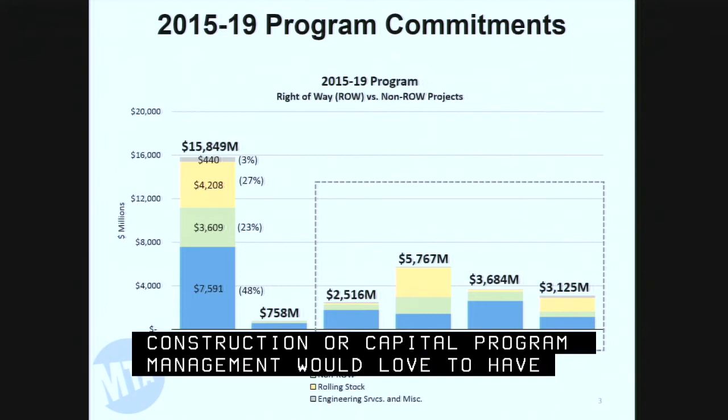We've been given a unique challenge, a great challenge, one that I think anybody in the field of engineering, construction, or capital program management would love to have: the ability to spend $15.8 billion over the next 3.5 years, all while running, maintaining, and operating the railroad. So this chart here, a different representation of the capital program, starts to show you the overall challenge in a different manner. It breaks it out into right-of-way work and non-right-of-way work.

Obviously, the right-of-way work is the work that potentially has an impact on the different operations of the railroad. So there's a big focus on making sure that as we roll out the program, we do it in a very strategic manner, very well coordinated, one that does everything possible to minimize the impact to the riding public. So of the 15.8, some $7.6 billion is right-of-way work, and that includes the in-house track work you saw on the preceding page. So as we go about planning which projects we're going to award when, we will look at the right-of-way needs of those projects for outages and how we can best manage it and spread that work out over the course of the next 3.5 years.

A major commitments follows chart. It starts to show you the typical projects that we will have.

Signal work is a big part of it. You'll see in this chart CBTC 8th Avenue, CBTC Culver, and 2 interlockings at 30th and 42nd Street. That's the kind of work Nadish is going to report on today, with follow-up reports as these projects are under design and construction under his purview.

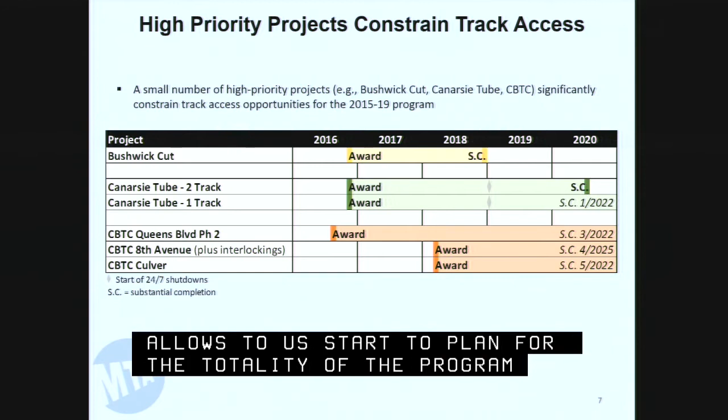So I'm going to repeat here a little bit about the Canarsie, but it winds up being, number one, the story of the moment, but also probably the largest project that New York City Transit will be undertaking for some time.

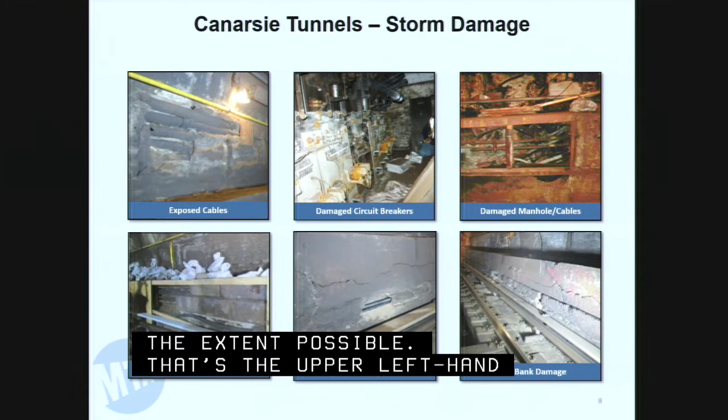The Canarsie tunnels did suffer some extensive damage. These photos start to show you pretty graphic details of the damage that occurred. The duct bank, which we saw video of earlier this morning at Transit Committee, was significantly damaged. We have exposed cables. We've secured the duct bank to the extent possible, that's the upper left-hand photo. The duct bank continues to be monitored such that any spalling or shedding of the encasement onto the tracks below is monitored very carefully.

Additionally, we've talked about all the damage that occurred to the electrical system. I'm now referring to the middle photograph on top, the damaged circuit breakers. That shows the type of damage that salt water can do in a very short period of time. This is a photo of the damage shortly after the storm, not an age-progressed photo. Damaged manholes and cables in the upper right.

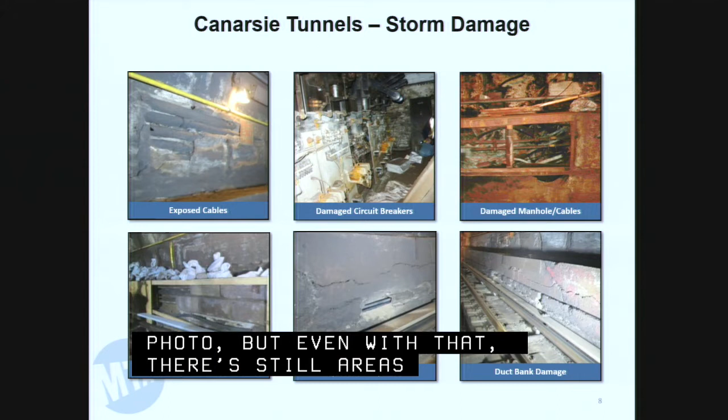Can't say it enough about how badly damaged this under-river tube was, but for all the facilities we've gone in and done temporary repairs, that's the bottom left-hand photo. But even with that, there are still areas you can see here with significant cracking of the duct bank, that's the lower middle photo, and the duct bank continues to show that damage.

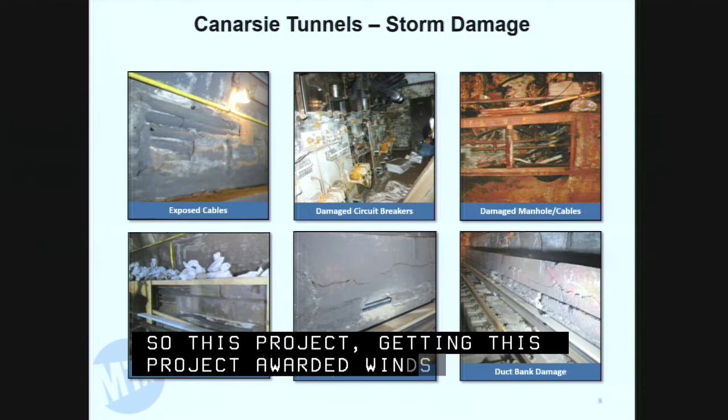So this project, getting it awarded, winds up being a priority in the program. The track part of it will not start until 2019, because there's street-level work that has to occur in 2017 and 2018 to prepare for the actual track outages beginning in 2019.

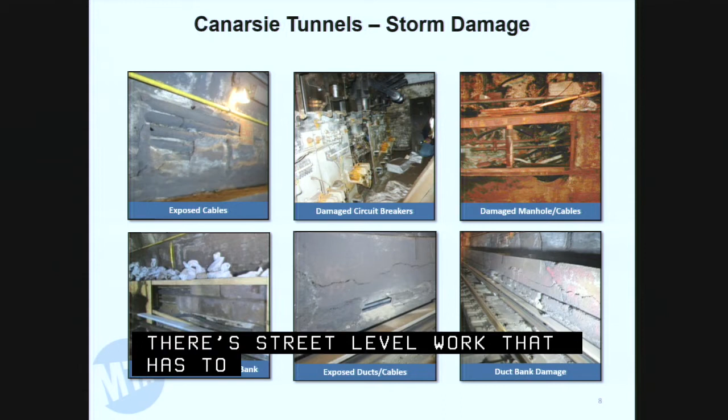Canarsie is in of itself a program of projects. It is a combination of a number of different initiatives: the under-river damage resulting from Sandy, the hardening of that facility so no water can flood into there again - that's the North 7th Street shaft as well as the Avenue D shaft, and the addition of 2 new substations that will allow for additional throughput of train capacity.

It is ADA and stair capacity at Bedford Avenue Station as well as at First Avenue Station. So it winds up being a roll-up of a number of different efforts all into one project, done in a manner that does not extend the outage duration at all.

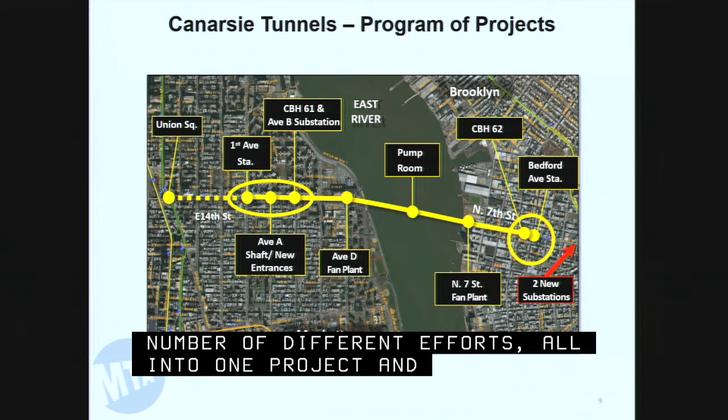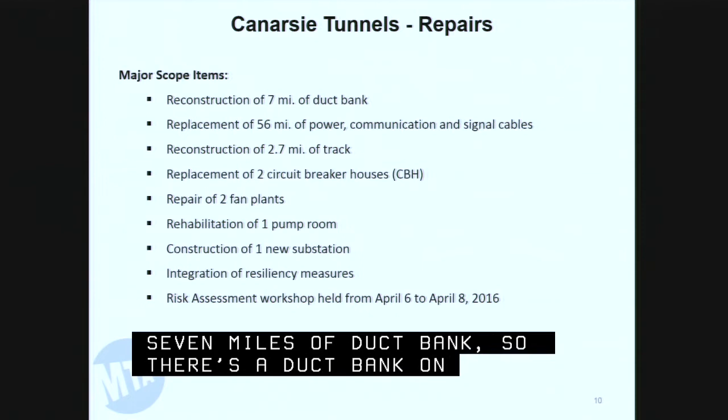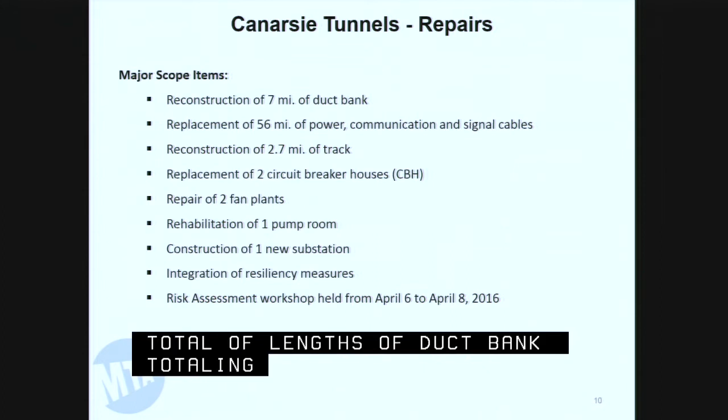We're going to replace some 7 miles of duct bank - there's a duct bank on both sides of each tube, so a total of 4 lengths of duct bank, totaling some 7 miles, that have to be demolished and replaced. There's some 56 miles of cable work. These are not small cables, this is very heavy-duty cable to pull and put into service.

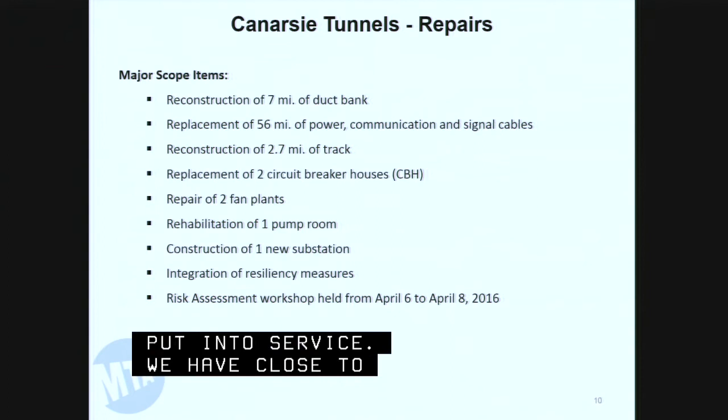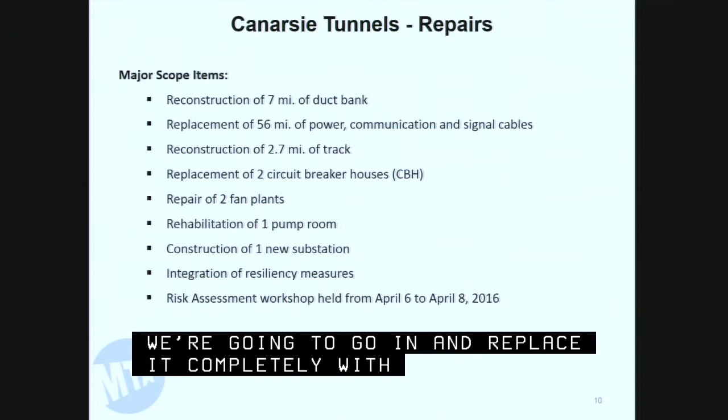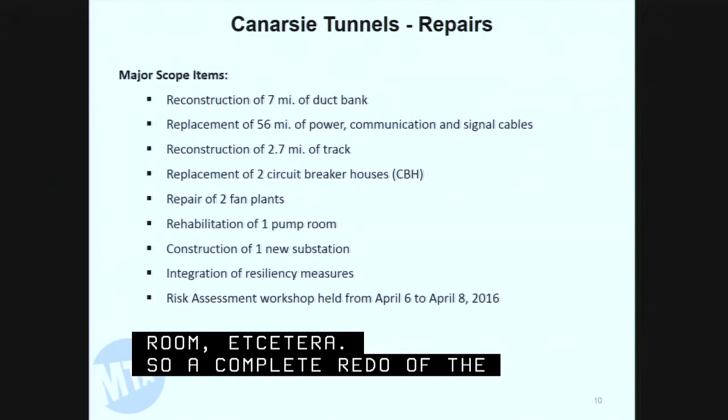We have close to 3 miles of track to rebuild. The track is going through an exaggerated deterioration that causes us to monitor it and make sure it's safe, but we're going to go in and replace it completely with this project. We're going to be building 2 new circuit breaker houses, repairing the fan plants, rehabbing the pump room, etc. - a complete redo of the systems necessary to provide for safe operation through the Canarsie tube on a long-term basis.

So that's Canarsie's $1 billion of the total $13.5 billion that Capital Program Management, New York City Transit Capital Program Management, is going to have to deliver over the next 3.5 years. But in order to deliver the rest of the program, we have to look at both the internal resources necessary - internal design and construction staff, as well as support staff - and we also have to rely heavily on the consulting community for design support and construction management support.

We call it CCM, Consulting Construction Management. We've been building on that for the last few years, and we're going to need to continue to build that in order to have the necessary support from outside to develop and progress this program.

I talked a little bit about track access planning and the need to optimize right-of-way access such that we minimize the impact to the riding public, which we will continue to develop and streamline. We need to work closely with the community and our customers through the construction process, and we have to embrace alternative contracting mechanisms such as design build.

We have avoided design-build for right-of-way type projects for quite some time because it's not the kind of project that necessarily lends itself to a design-build strategy. However, as an example, we are going to try it, managing the Clifton Shop project as a design-build where there is right-of-way interface. There are many other design-build projects we're going to be doing, but I'm just trying to give examples of the projects that we have.

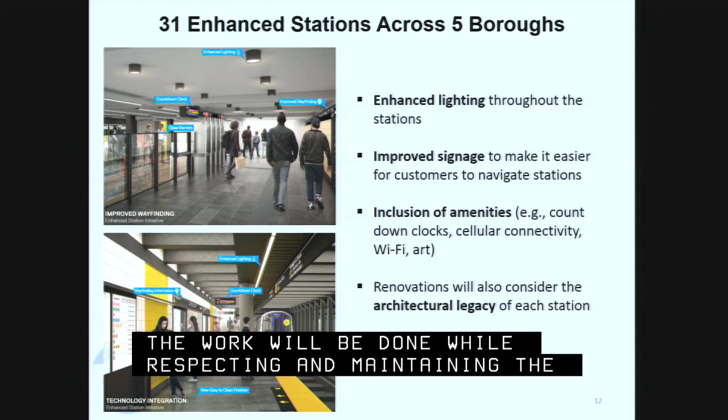We're going to be including amenities we don't currently have, such as countdown clocks, cellular connectivity, and Wi-Fi. There will also be use of art to enhance these stations. The work will be done while respecting and maintaining the architectural legacy of each of the stations we go along. So that's just a synopsis of the kind of work we're going to be doing as part of this enhanced station effort.

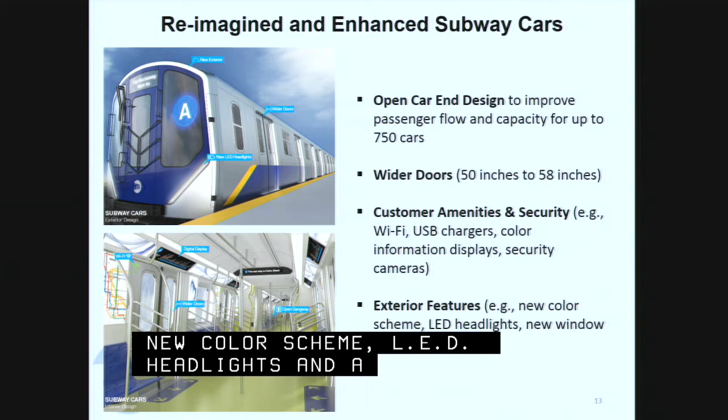So these are the kind of projects and programs that are underway within the $15.8 billion of the 2015 to 2019 capital program. Thank you.

How were the 31 enhanced stations chosen? They were chosen from within the program proposal. There was a number of stations chosen from the overall capital program proposal that had already been made when this challenge was brought to us.

So we worked with stations that were already in the program proposal. Some of them were in as formal renewals - some on the Astoria line were actually going to be getting renewals - and some were in as component projects where we were doing certain levels of component repair. So we took those stations and looked at them, and we're just elevating the aesthetic treatment they're getting to enhanced station renewal. They were already in the program.

But we tried to get a balance - in the past we'd gone to high volume stations, but in this particular case we needed to take another look with respect to geographical distribution. So there was no single factor; looking at it through a number of different prisms - volume, condition, geographical representation - we tried to get these 31 stations across the entire system.

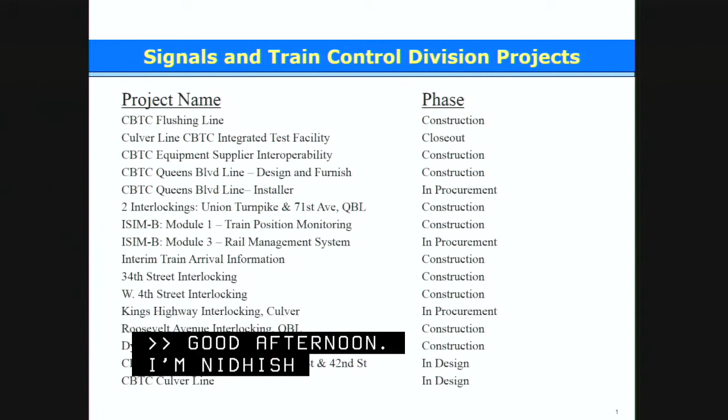My presentation includes 4 CBTC projects: Flushing Line, QBL Line, Culver, and 8th Avenue, and a project to qualify a 3rd CBTC supplier. I will also update you on the Integrated Service Information and Management, ISIM, Module 1 and Module 3 project, and some of my interlocking projects are also part of this presentation.

The CBTC Flushing Line contract was awarded to Thales in June 2010. The project overlays a new CBTC system on the Flushing Line from Main Street to 34th Street Terminal, and also modernizes 2 interlockings, 1st Avenue and Times Square. This contract also equipped 46 trains with CBTC equipment. Trains are procured and modified under a separate contract with Kawasaki.

Before you leave that slide, next time you make it, you'll want to change the 52nd Street station to Lincoln Avenue, not Lincoln Street. Okay, yeah.

We deliberately put things in presentations to see if you catch them, Andrew. That's a joke.

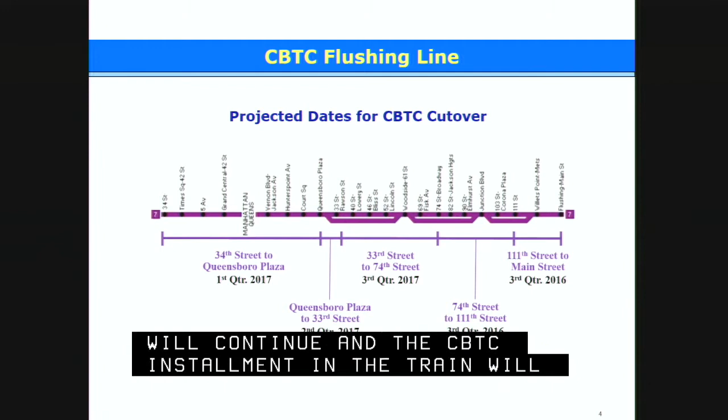This is the current revised CBTC cutover plan. The CBTC system will provide the capability to add at least 2 more trains by the end of 2017.

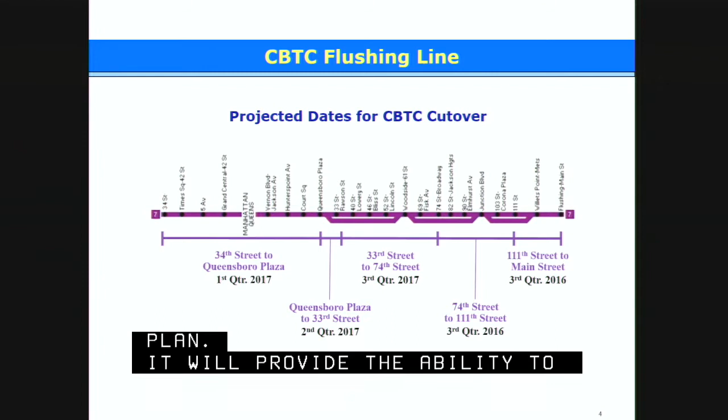Next slide. There are 4 critical issues or activities we are monitoring closely to maintain the current schedule.

The project team has developed a detailed plan for CBTC testing and commissioning and has identified all the needed track outages from now to 2017. The project team is working with the internal department to secure these outages. As I mentioned, CBTC will be in service from Main Street to 74th Street by 3rd quarter 2016, subject to reliability and stable performance of the CBTC system.

Beyond 74th Street, CBTC cutover requires all 46 trains equipped with CBTC equipment. The Corona Car Shop is working very hard to complete all the installation on time to ensure CBTC cutover beyond 74th Street by March 2017.

So is there a schedule available for further GOs for you to do this? Yeah, we develop all the GOs we need for testing, cutover, and removal for end of this year up to the end of '17. All the GOs are being discussed with operation planning and RTO, so they are all aware of it.

Right now we have a confirmation for all the 16 and also 17 GOs. And further, if you cut over Main Street to 74th Street and make that CBTC usable, you can't run more trains just in that section because you have to have it for the entire line, otherwise you're trying to shove too much into it.

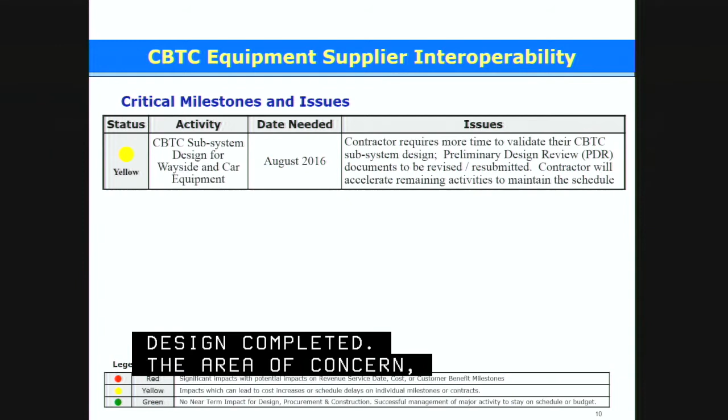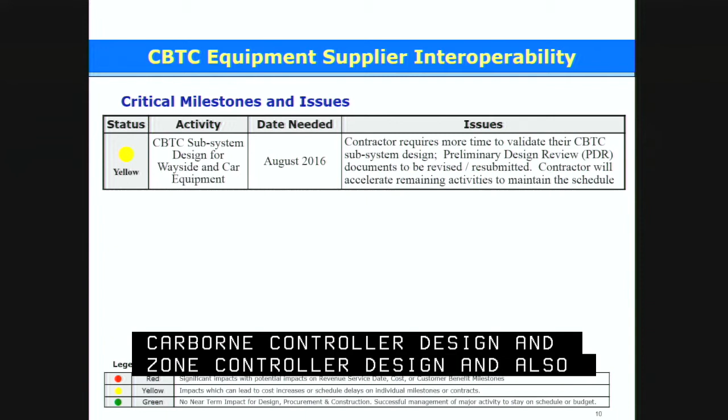The area of concern: we are actually concerned about Mitsubishi's level of achievement on the carborne controller design and zone controller design, and also their projected reuse of software and compliance with the interoperability interface specification. The contractor is assuring us that they are increasing their qualified staff and accelerating certain activities to ensure timely completion of the contract.

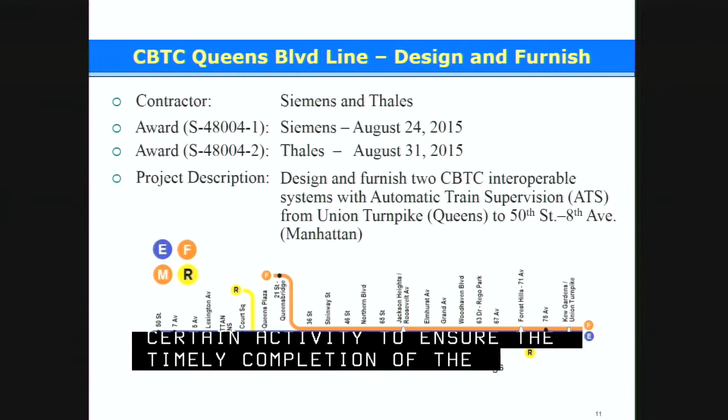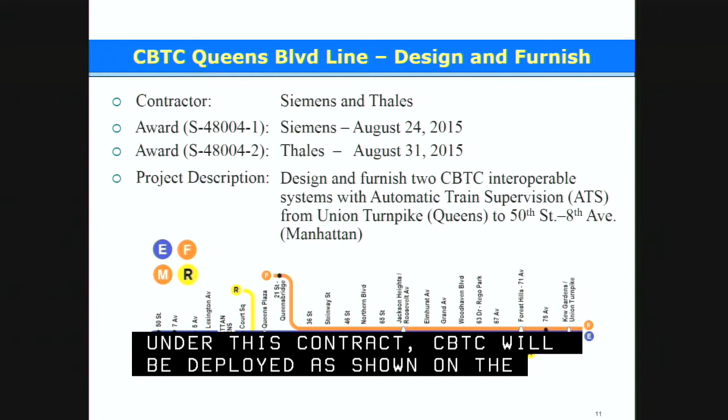The CBTC Queens Boulevard Line design and furnish contract has been awarded to Siemens and Thales in August 2015. Under this contract, CBTC will be deployed on the E, F, M, and R lines as shown in the map, and we're going to also equip R100 and R160 units with CBTC equipment.

The contract is on schedule and within budget. A lot of progress has been made. For example, radio layout has been completed by Siemens, and the CBTC car equipment repackaging conceptual design also completed by Thales. For the next 6 months, Siemens and Thales are to complete preliminary site-specific CBTC design, and Thales to complete detailed design of the car equipment repackaging.

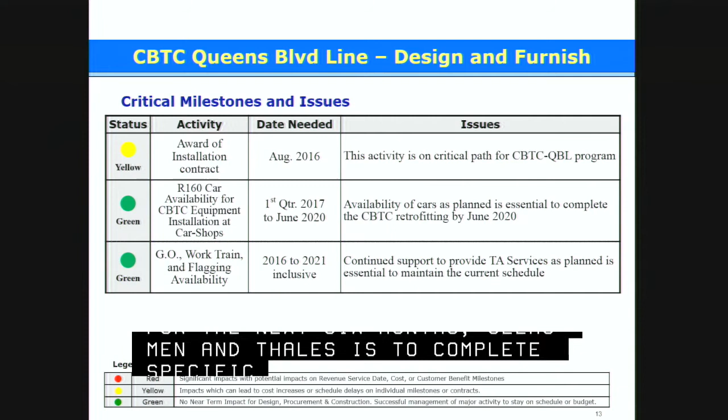There are three areas of concern. First, award of the installation contract by August 2016 to maintain the current schedule of the CBTC overall contract. We are opening the bid soon, so we should meet that goal.

All the trains need to be equipped by June 2020 to maintain the CBTC overall cutover plan. The third item is, as John mentioned, that we are also ensuring that all the TA services assigned or planned for these contracts are available so we can go into service as planned.

The CBTC Queens Boulevard Line installer contract is in the procurement phase, and a future contractor will install all the CBTC equipment except the car equipment, and support CBTC testing in addition to performing all conventional signaling work. Contract bid opening is scheduled for August 4th, and award will follow. Delays of the contract are due to the contractor requiring more time to finalize their current bid.

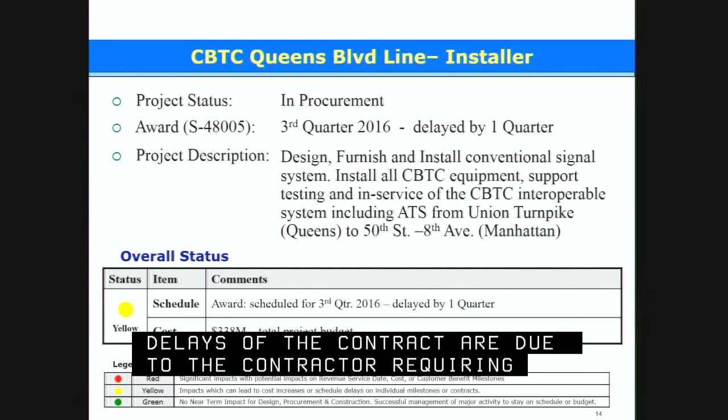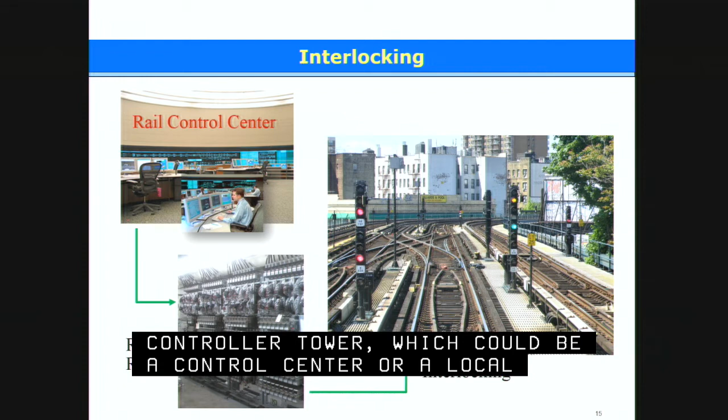I just added a picture of the control tower, which could be a rail control center, a local tower, or a master tower, a relay room, and the equipment that goes into the wayside, to give you a picture of what interlocking is all about. And most of the interlocking projects, I'm going to talk about now.

The two interlockings, Union Turnpike and 71st Avenue QBL, substantial completion originally scheduled for April 2017, is now projected for fourth quarter 2017, delayed by one quarter since my last report. The contract is within budget. Because of the delays to this project, coordination between this contractor and the installer contractor for CBTC has become essential, and we're going to monitor that.

ICMB Module 1, this contract has been awarded to Yonkers Electric in November 2015, and the contract is on schedule and within budget.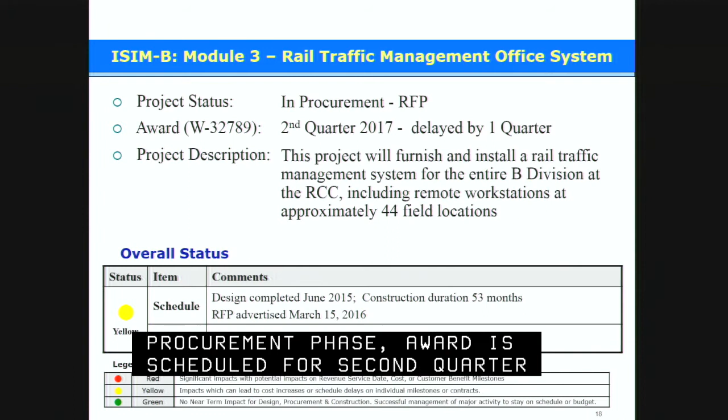Integrated Service Information and Management, ISIM-B Module 3, contract is in the procurement phase. Award is scheduled for second quarter 2017, delayed by one quarter for the following reason: we anticipate a longer technical negotiation with the selected contractor to address interface and integration with the QBL ATS contract, functional and system requirements, including the overlapping function between the QBL ATS and this contract.

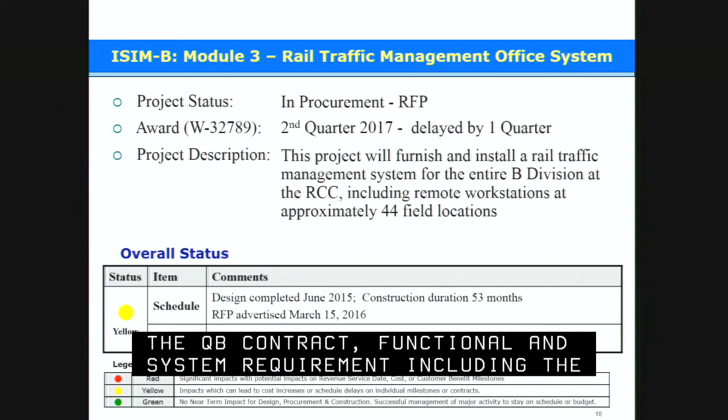Question: will ISIM-B have the ability to differentiate if there are multiple trains on a line?

Will it be able to differentiate if there's multiple trains on a line?

I believe it is, yes, once you add the schedule. It provides the same functionality that ATS does on the A division. So it won't just know that a train is coming in a certain amount of time, it'll know which train. Right, that's correct, because we're adding a train schedule at the terminal, and that's why the design of the QBL ATS and ISIM-B address that issue.

So does that mean that the, for want of a better term, countdown clock will show the same information on the A and B divisions? Between QBL ATS and ISIM-B Module 3, that information will be available starting June 2020.

We're looking at ways to separate out from ISIM-B the delivery of countdown clock information for the B division on a faster time frame. The idea is to provide the same level of functionality. It may not be the same exact display as what you see in the A division right now, but it would be train information and estimated arrival time, minutes to platform. We're looking to see if there are ways we could provide the countdown clock piece in advance of ISIM-B. ISIM-B's primary purpose from the get-go was to enable the control center to have automatic train supervision like they have on the A division right now, rather than decentralized control across all the towers, master towers.

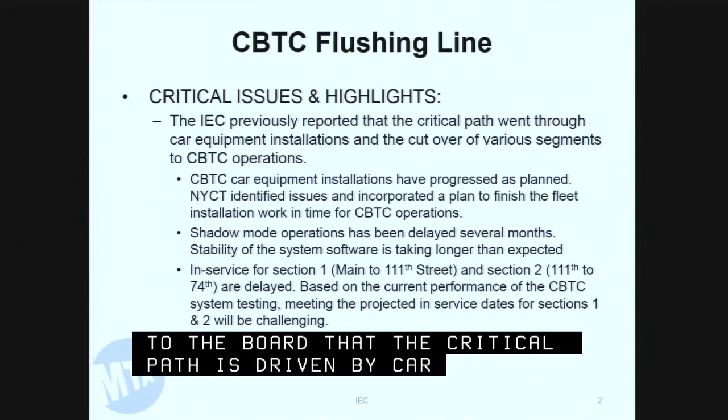With respect to project critical issues, we previously reported to the board that the critical path is driven by car equipment installation and the cutover of various line sections to CBTC operation. The project team has implemented a plan to complete fleet installation work in time for CBTC operation, so we don't believe at this time that fleet installation work is on the critical path.

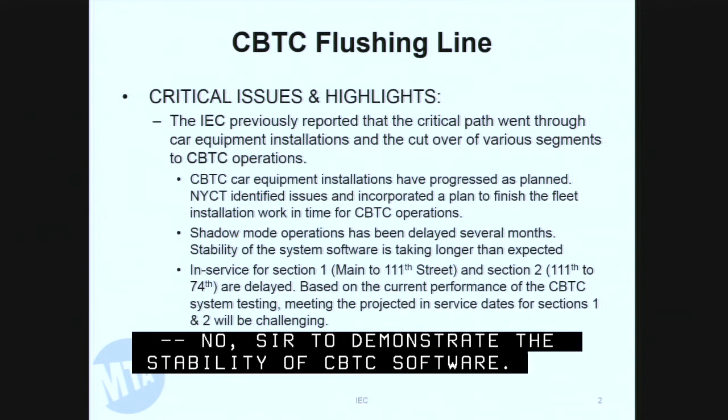On the other hand, as was reported earlier, shadow mode testing has been delayed several months to demonstrate the stability of CBTC software. In turn, the in-service dates for Section 1, between Main Street and 111th Street, and Section 2, between 111th Street and 74th Street, are delayed. We are concerned that based on the current performance of CBTC system testing, achieving the in-service dates for these 2 sections in the third quarter of 2016 will be challenging.

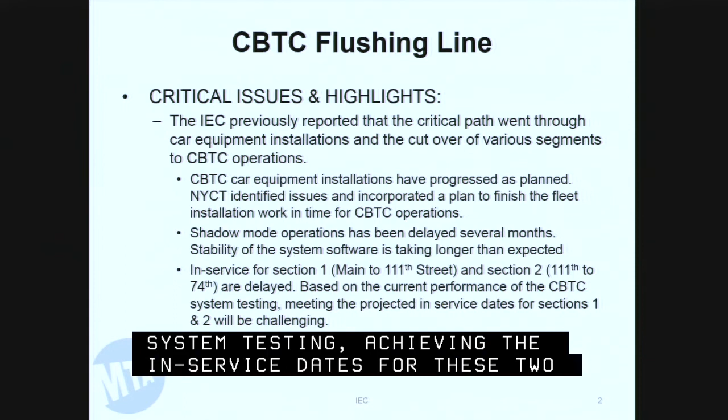Next page. As reported by the project team, the Culver Line CBTC Integrated Test Facility project has achieved substantial completion, and there are no issues related to the budget.

With respect to the Queens Boulevard Line CBTC Design and Furnish project, the contractor is progressing the design documents, and the IEC concurs that this project is on schedule and within budget.

With respect to the installation project for the Queens Boulevard CBTC, the closing date for receiving bids was delayed by 3 months, and the budget needs to be confirmed once the project is awarded.

So looking at the CBTC QBL program that includes the design, furnish project and the installation project, we do agree that the award date for the install project is now on the critical path for the program. We are concerned that additional work orders may be required to finalize the interfaces between the ISIM-B Module 3 system and the automatic train supervision element of the CBTC system.

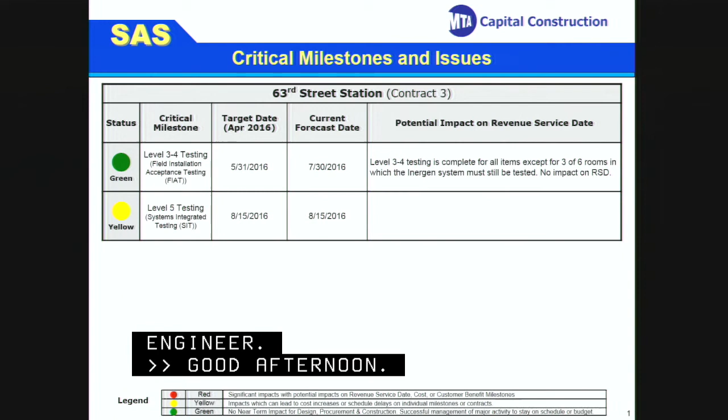Critical milestone and issues on 63rd Street Station. Level 3 and 4 testing is complete for all the items except 3 of the 6 rooms in which the Inergen system must be tested.

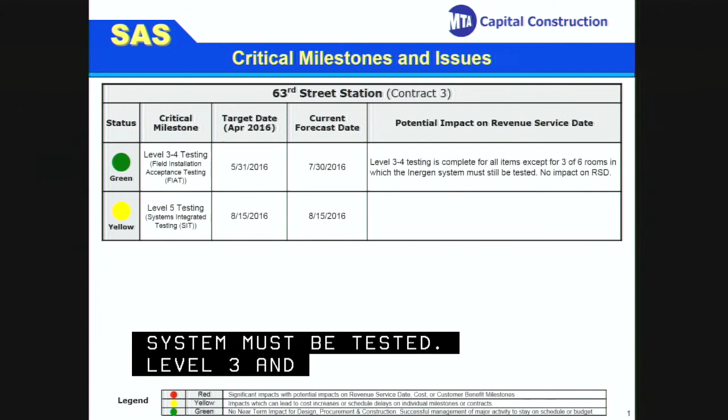Level 3 and 4 testing is complete for tunnel and station smoke management systems, fans, HVAC, fire life suppression system, elevators and escalators. There is no impact to RSD. Level 5 testing is scheduled to be completed by August 15th.

Next slide, please. 72nd Street Station. Tunnel and station smoke management system and HVAC installation was completed on June 20th, 2016. Water mist system installation will be completed by July 31st.

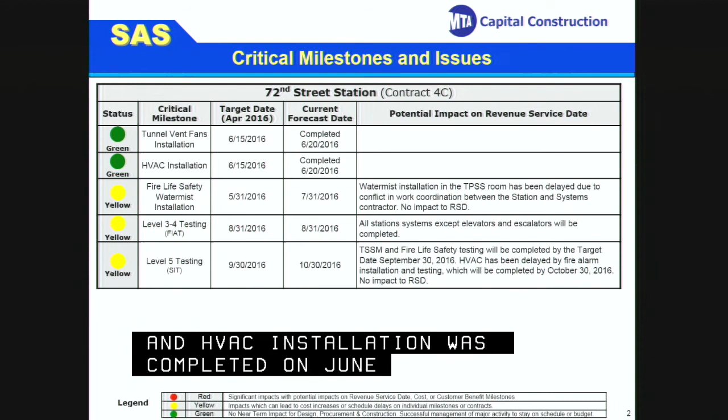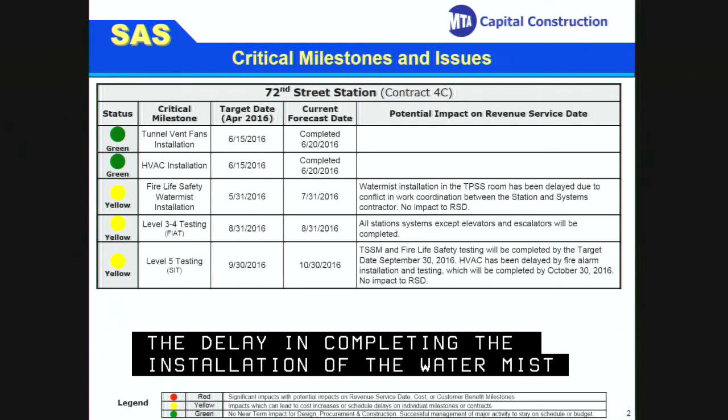The delay in completing the installation of the water mist system in the traction power substation room is due to the conflict in the work coordination between the station and the system contractors. There is no impact to the revenue service date.

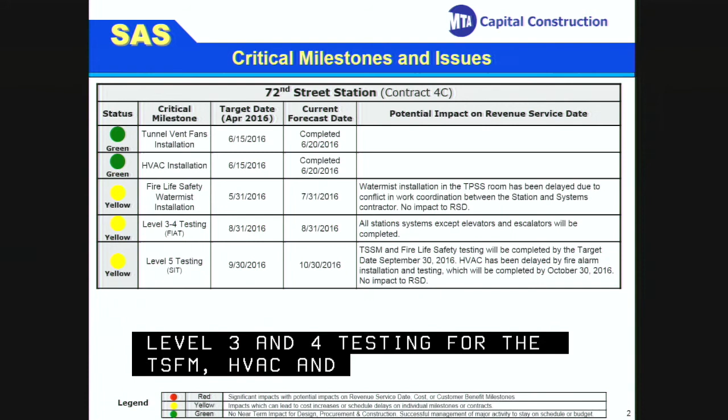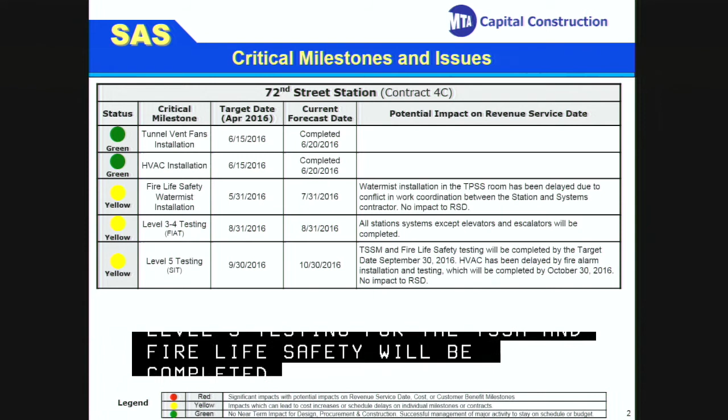Level 3 and 4 testing for the TSSM, HVAC, and fire life safety is on target to be completed by August 31st, 2016. Level 5 testing for the TSSM and fire life safety will be completed by September 30th. HVAC testing has been delayed by fire alarm installation and testing, which will be completed by October 30th. There is no impact to revenue service date.

Next slide. Escalator installation and testing, except escalators at entrance 1, is on target to be completed by September 30th. Entrance 1 escalator is on target to be completed by October 28th. Entrance 1 escalators level 3, 4, and 5 testing is on target to be completed by November 30th.

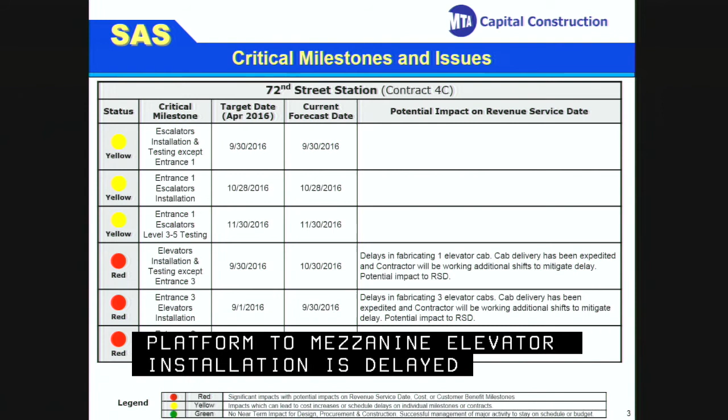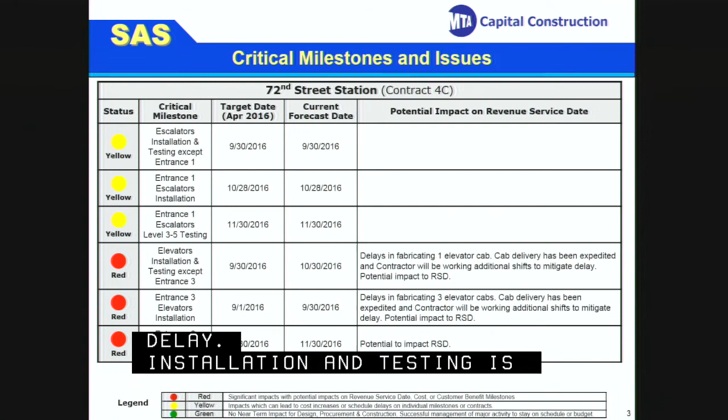Platform to mezzanine elevator installation is delayed as a result of a delay in fabrication of the elevator cab. Cab delivery has been expedited and the contractor will be working an additional shift to make up the lost time and mitigate the delay. Installation and testing is expected to be completed by October 30th. There is a potential impact to the RSD if we don't get the cab delivery currently scheduled.

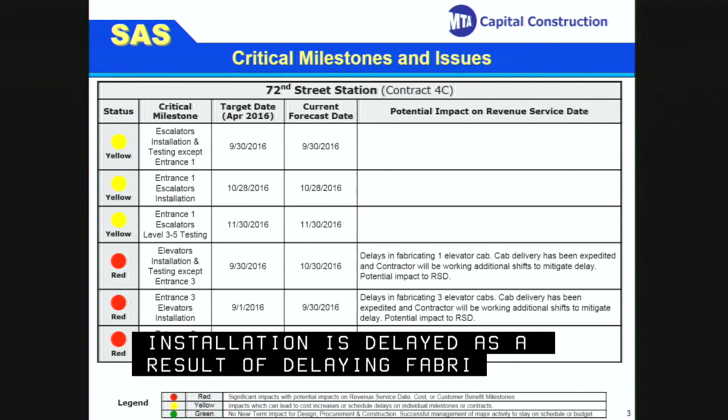There are 5 elevators at entrance 3. Entrance 3 elevator installation is delayed as a result of a delay in fabrication of the 3 elevator cabs, and it may cause the target date to slip. Cab delivery has been expedited and the contractor will be working an additional shift to make up the lost time and mitigate the delay. There is a potential impact to revenue service date. Testing for all 5 elevators at entrance 3 will be delayed for the same reasons described before.

86 station. There are 13 escalators at this station, and installation will be completed by July 31st. There are 2 elevators at this station, and installation will be completed by July 31st.

Next, TSSM, HVAC, and fire life safety system installation was completed on June 17, 2016. Level 3 and 4 testing for all station systems will be completed by August 15th, except elevators and escalators. Level 3 and 4 testing for elevators and escalators will be completed by August 30th. There is no impact to revenue service date.

Level 5 testing for the TSSM and fire life safety will be completed by September 30th. HVAC testing has been delayed by fire alarm installation and testing, which will be completed by October 30th, and there is no impact to revenue service date.

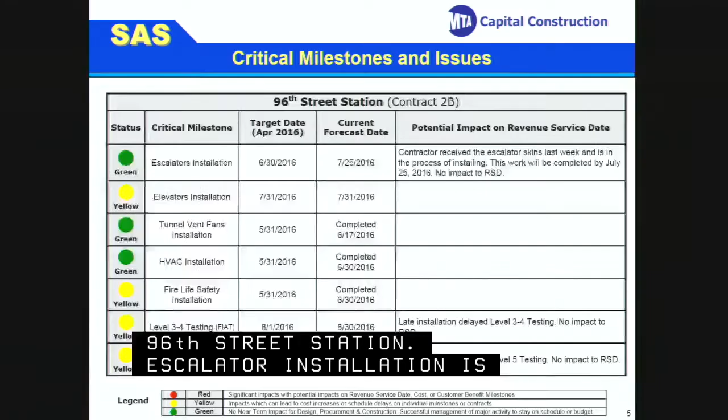96 station. Escalator installation is delayed. Contractor received the escalator skins last week and is in the process of installing it. This work will be completed by July 25th. I don't have confirmation as of today, but we expect that to be completed, and there is no impact to revenue service date. Elevator installation is scheduled to be completed by end of July.

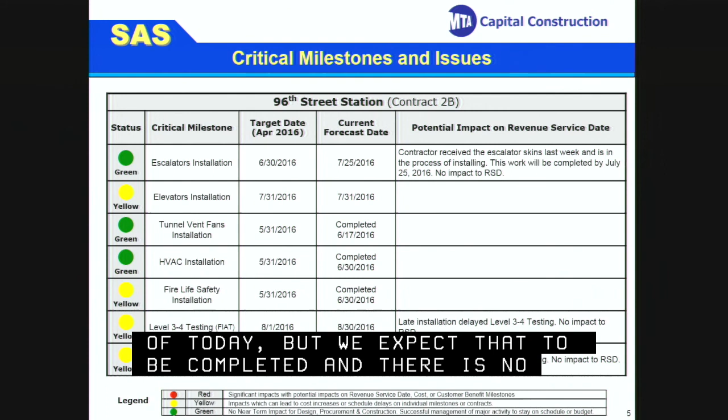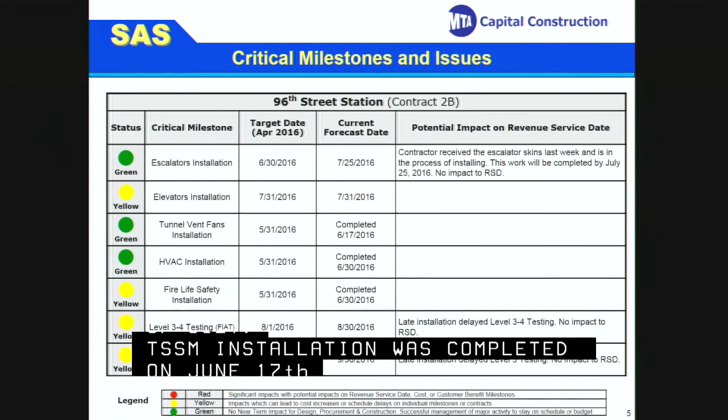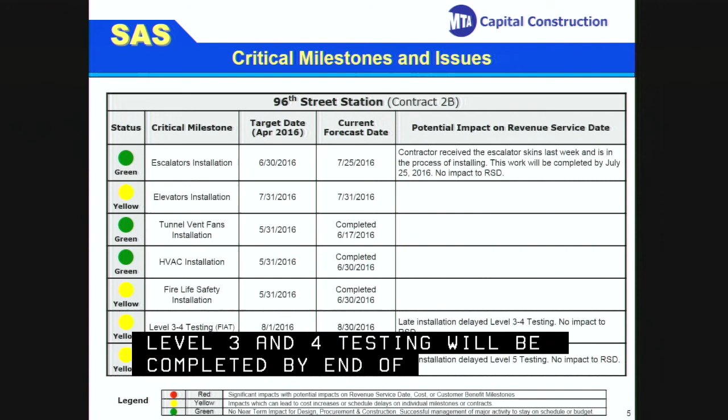TSSM installation was completed on June 17th, and HVAC and fire life safety system installation was completed on June 30th. Level 3 and 4 testing will be completed by end of August. The delay was due to the late installation of TSSM, HVAC, and fire life safety systems. There is no impact to revenue service date. Level 5 testing will be completed by September 30th. The delay is due to the late completion of level 3 and 4 testing.

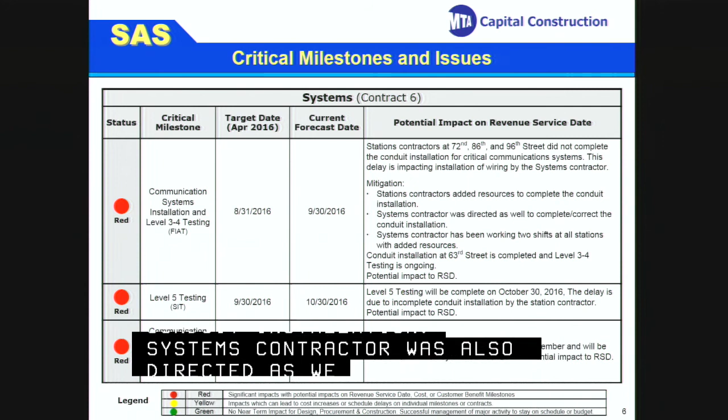Systems contract. Communication system installation and level 3 and 4 testing will be delayed due to incomplete conduit work by the station contractors. To mitigate the delay, the station contractors were directed to add resources to complete the conduit installation. The systems contractor was also directed to complete and correct the conduit installation, and has been working 2 shifts at all stations with added resources. There is a potential impact to revenue service date.

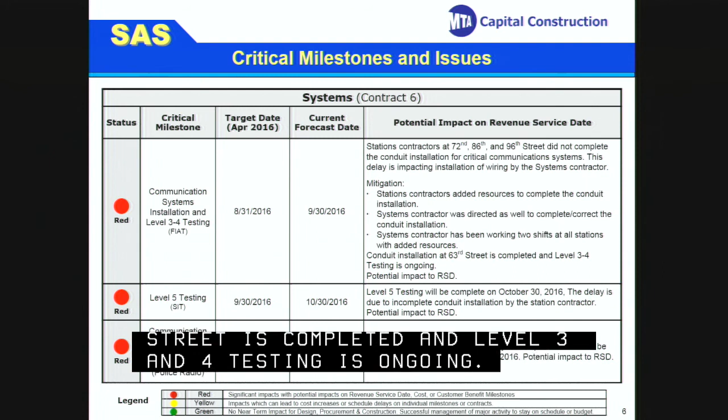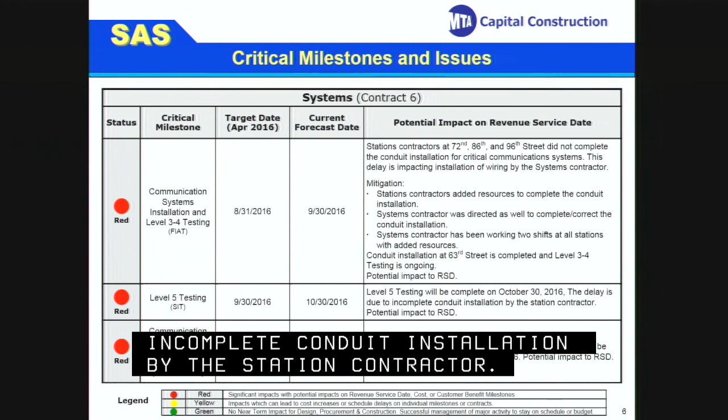Conduit installation at 63rd Street is completed, and level 3 and 4 testing is ongoing. Level 5 testing for the communication system will be completed by October 30th. The delay is due to the incomplete conduit installation by the station contractors. The police radio system installation and testing is on target to be completed by October 15th.

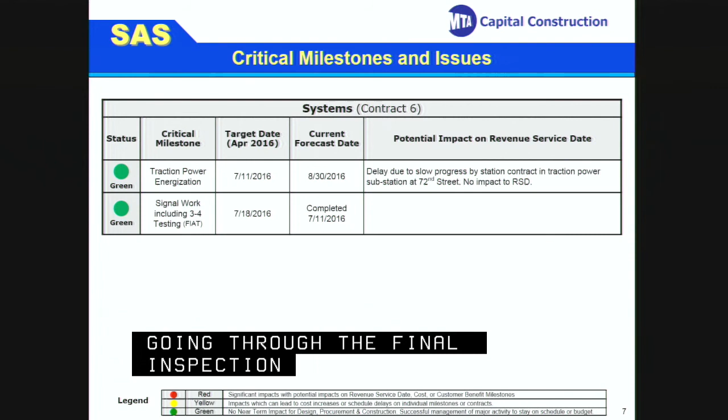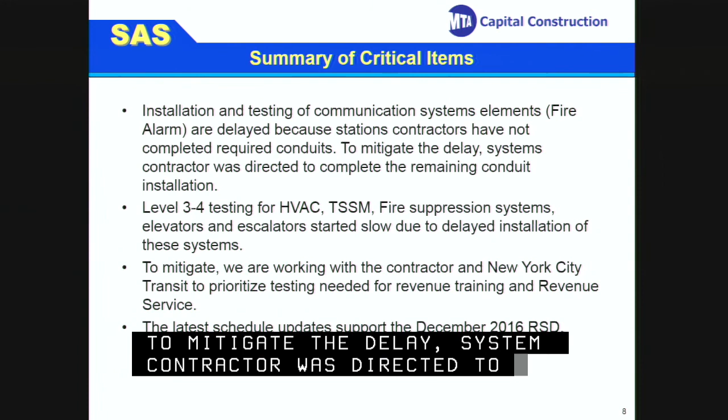Summary of the critical items. Installation and testing of communication system elements such as fire alarms are delayed because the station contractors have not completed required conduit installation. To mitigate the delay, the systems contractor was directed to complete the remaining conduit installation. Level 3 and 4 testing for the HVAC, TSSM, fire suppression system, elevators, and escalators started slowly due to the delayed installation of these systems. To mitigate, we are working with the contractor and New York City Transit to prioritize the testing needed for revenue training and revenue service. The latest schedule update supports the December 2016 revenue service date.

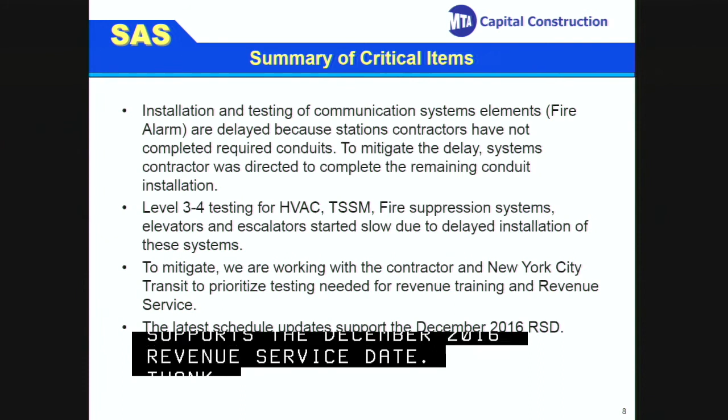So let me get this straight. If I got this straight, the station contractor did not do his job.

That is correct. And as a result of that, we've told the systems contractor, who comes in after the station contractor, to do the job that the station contractor did not do.

That is correct. And we are keeping a financial track of who did what to whom, and a timing of who did what to whom. Absolutely. Okay, I just wanted to make sure I got the point. No, you got the point.

And there's no question about the competency of the systems contractor being able to do that work. We've just added that scope to his work because he didn't have it before. Correct. It's better than waiting for the other.

If we're all aimed at the objective of getting it done on time, it makes more sense to do that than to just continue. There is no doubt. I just wanted to clarify, but the two contractors are different contractors. Yes, they are.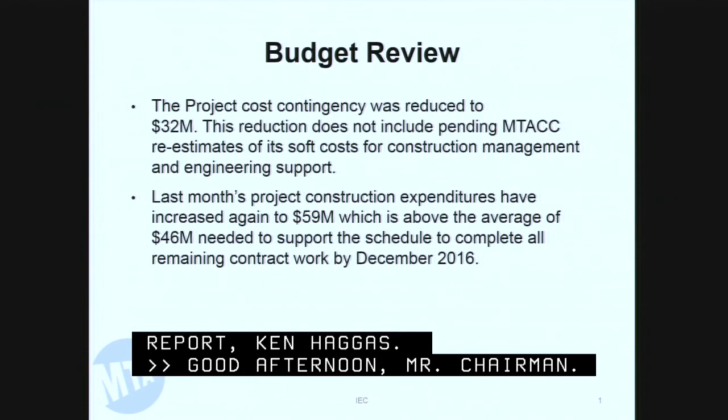Good afternoon, Mr. Chairman. Let me start my monthly update with the budget review. The project cost contingency was reduced to $32 million. This reduction doesn't include pending MTACC re-estimates of their soft costs for construction management and engineering support. Last month's construction expenditures have increased again, this time to $59 million, which is above the average of $46 million we calculate is needed to support the schedule to complete all remaining work by December.

Turning to the schedule, in our review of the progress in June, we have several concerns, mostly to do with the milestones and the test program results. Starting with schedule milestones, 2 out of 8 milestones due in June will meet their target date within the 30-day grace period allowed. The overall schedule milestone completion through the end of June is 23 out of 33, that's 70%, less than the 80% reported last month for milestones due through May. Delay in the provision of the communications infrastructure was the primary cause of the disappointing performance in June.

Secondly, the test program has slipped further behind schedule for test completion. Out of a total of just over 600 tests scheduled through the end of June, 336 are reported complete. That's 55%, a reduction from the 67% of scheduled tests completed through the end of May. Somewhat as a consequence of this, we note that MTACC has postponed the scheduled start of pre-revenue operations training for New York City Transit by 30 days, to October 1st.